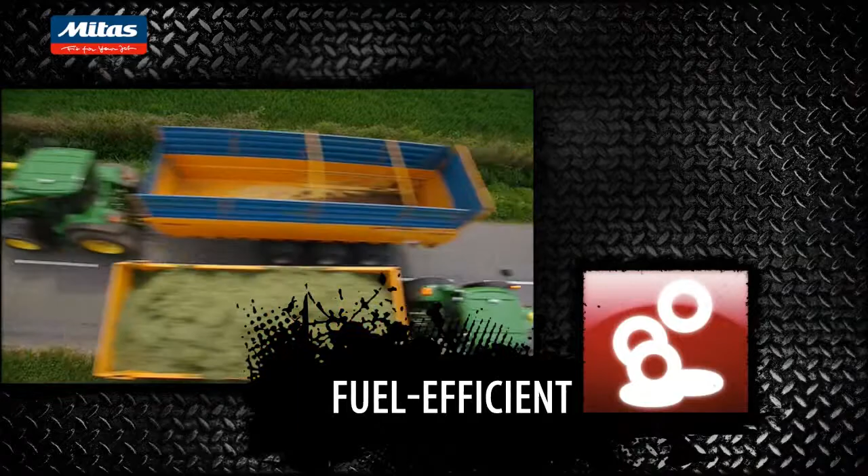Roads cover only 0.3% of the Earth's landmass. 40% is agricultural land, and the rest is new challenges and adventures. Off the roads, people need our tires. Reliable. With long life. Preserving power. Fuel efficient. Custom made. And environmentally friendly.

Welcome to MITAS. What makes our tires reliable? At our oldest factories, tires have been produced since the 1930s. These are our factories in Zlín and Prague in the Czech Republic. Originally, these factories produced tires and tubes for cars, motorcycles, and bikes. The name MITAS has been used since 1947.

Agricultural tires became the core of our business in 2004 when we acquired the agricultural tire division of Continental AG. We then bought the tire factory in Ruma in Serbia. In 2010, we announced our first North American factory, producing radial agricultural tires in Charles City, Iowa. The grand opening of the MITAS factory took place 2 years later in April 2012. Another important milestone was the opening of the new radial agricultural tire plant in Otrokovice, Czech Republic. Our biggest factory was opened in November 2013.

MITAS today. MITAS is one of the leading European producers of tires for use in agriculture, construction, and industry. Almost all speedway motorcycles in Europe are mounted with MITAS tires. 1 of 4 tractors and harvesters produced in Europe leaves the production line fitted with our tires.

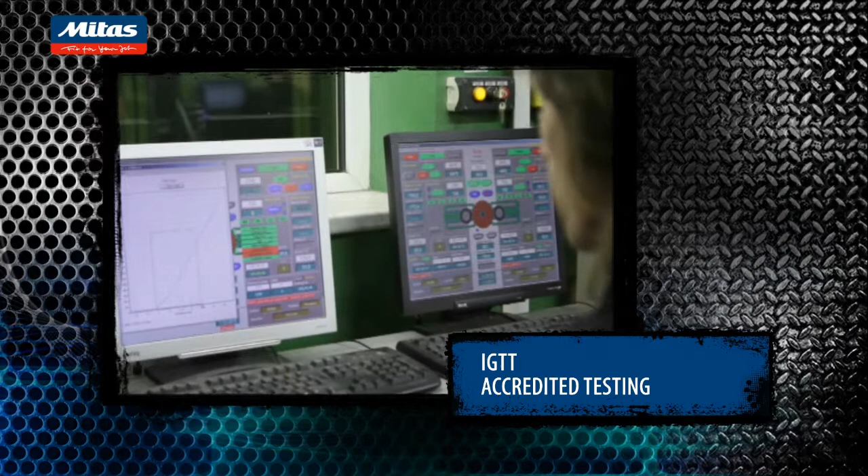We respect international standards. MITAS is a member of the International Association of Tire and Rubber Manufacturers, ETRMA, ETRTO, and TRA. We invest in research and development to make our tires long-lasting, fuel-efficient, and reliable. The process of developing a new tire, creating rubber compounds, and testing may take up to 4 years from conception to production. Tires undergo testing in operating conditions and in our accredited testing facility, the IGTT. We insist on quality, effective production, employee expertise, and environmental protection.

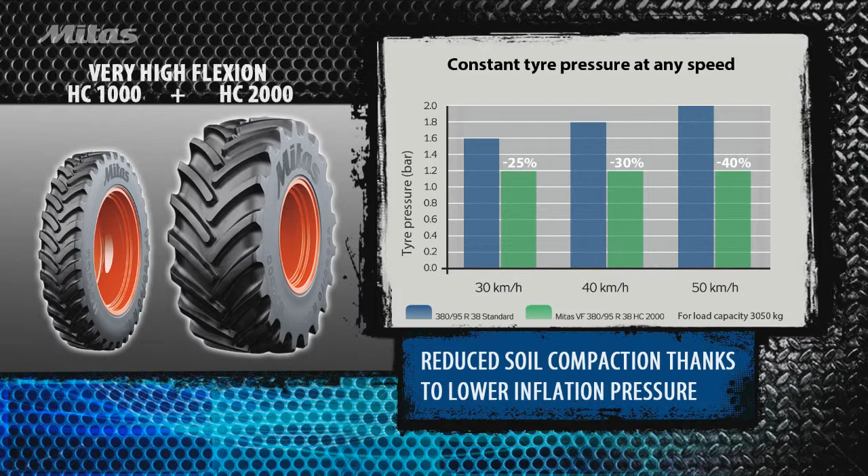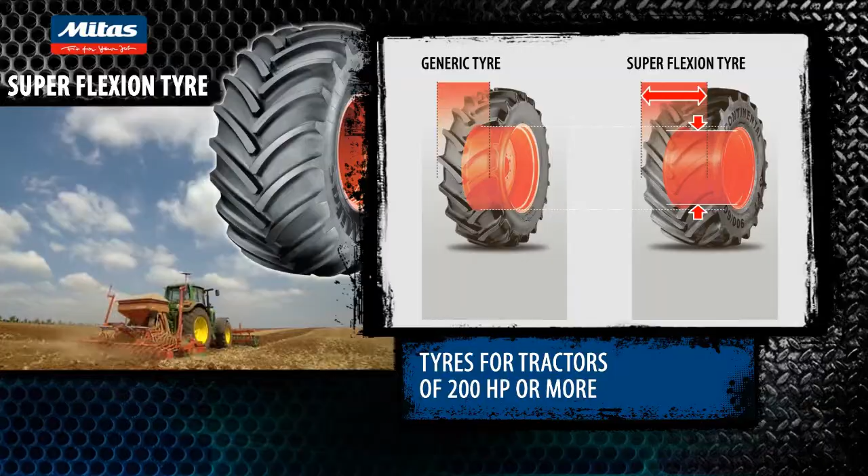Tires with new features. MITAS developed the very high flexion tire to meet the demand of increased load and speed requirements of agricultural machinery. The new VF product lines are HC1000 and HC2000. Superflexion tires are made for power tractors of 200 horsepower or more. With silent speed tires, we have managed to decrease noise levels in tractor cabins by 50%.

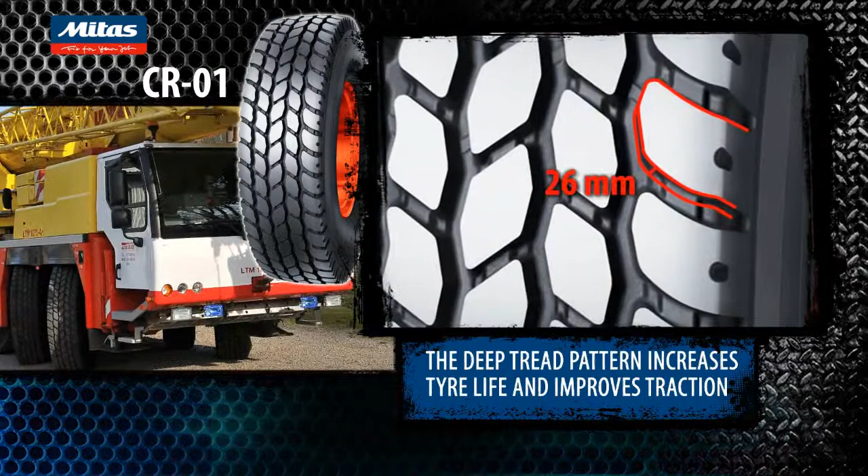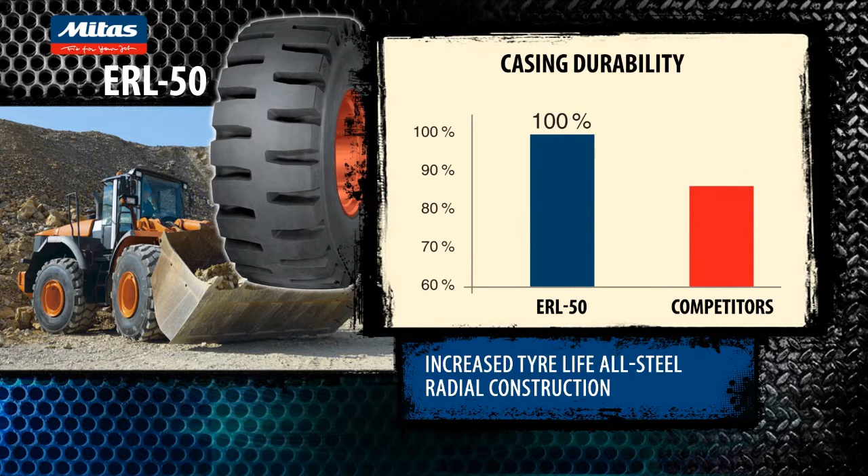When driving, the links between the tread blocks of the CR01 tires stabilize mobile cranes and even out tread wear. An innovative tread compound in all-steel radial construction increased the casing durability of the ERL50. AgriTerra is a flotation tire intended for trailers. AgriTerra has a longer tire life and improved self-cleaning properties.

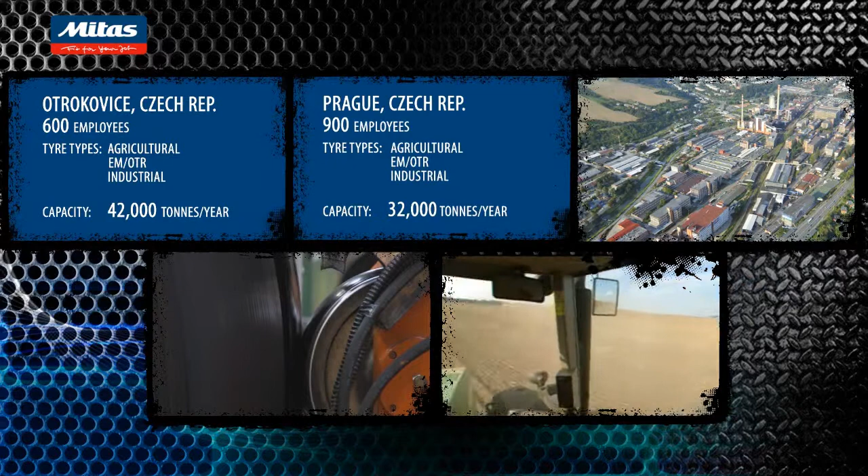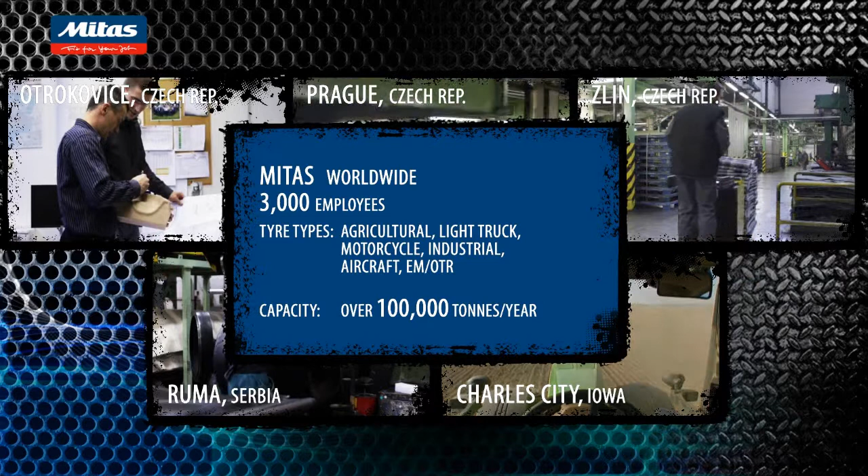MITAS production plants. MITAS produces tires at 4 European factories. In the Czech Republic, our production plants are located in Otrokovice, Prague, and Zlín. In Serbia, the MITAS plant is located in Ruma. Since 2012, MITAS is also present in Iowa in North America. MITAS has 3,000 committed employees. The total annual production capacity exceeds 100,000 tons.

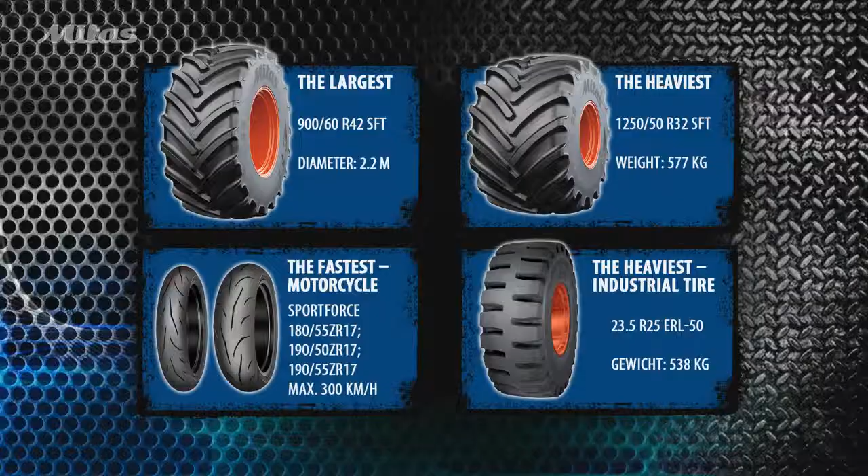Interesting facts about MITAS tires. The largest tire produced by MITAS has a diameter of 2.2 meters and features 38.5 kilometers of cord. The heaviest tire weighs 577 kilograms and contains 63.6 kilometers of cord. The fastest road tire is a motorcycle tire, Sportforce, that allows speeds of up to 300 kilometers per hour. And the heaviest industrial tire produced by MITAS weighs 538 kilograms and features a tread pattern depth of up to 90 millimeters.

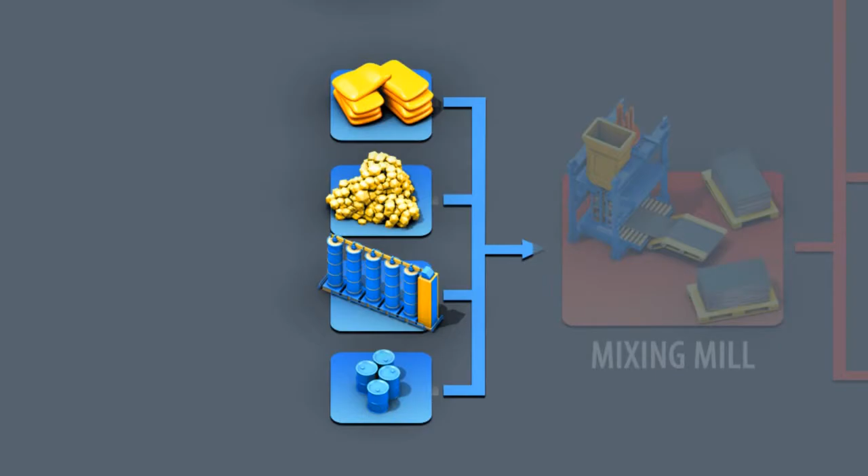This section explains how tires are produced. These are the main stages of tire production. The basic components in tires are steel wires and cord, natural and synthetic rubber, various chemicals, and carbon black. The dominant component in tires is rubber.

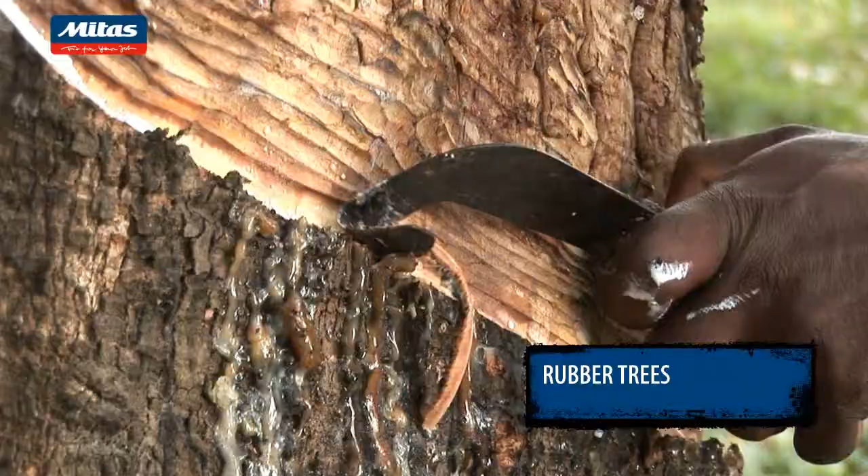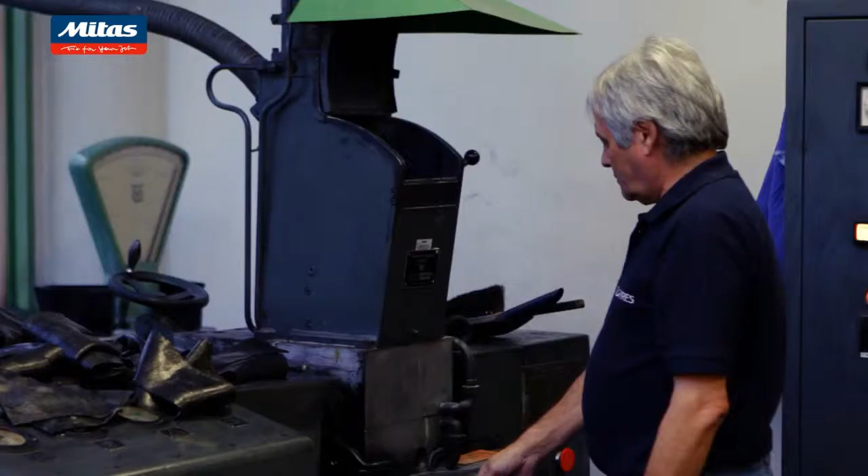8,000 kilometers from the heart of Europe, rubber trees are grown. Incisions are made to harvest the liquid latex. Natural rubber is the most important product obtained from latex. Rubber is then transported to the production plant with the rest of the raw materials and components. In a laboratory, the quality and physical properties of the rubber are tested. If the sample complies with our stringent requirements, the batch is delivered to the mixing room.

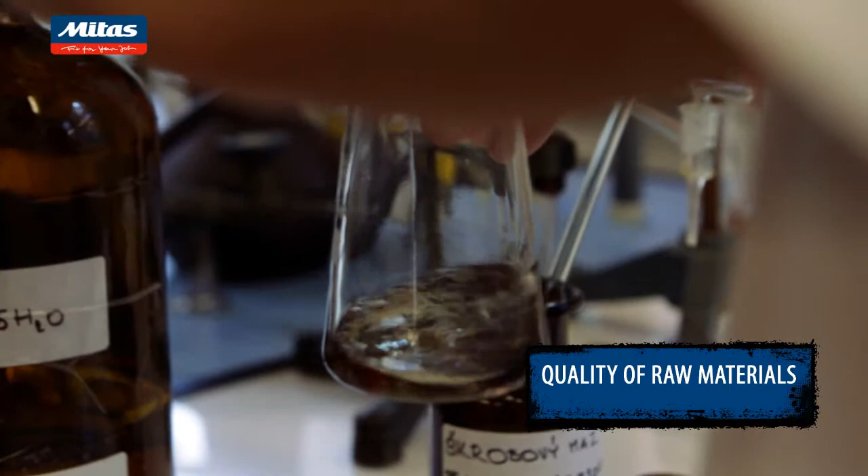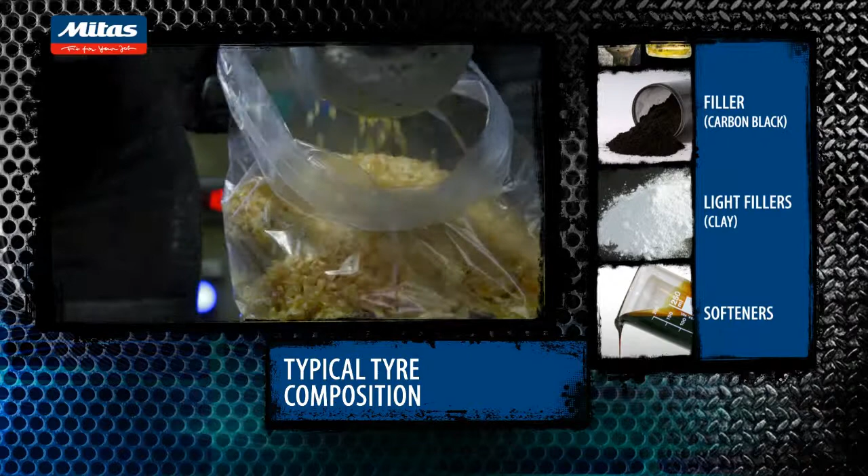Rubber compound mixing. The first stage of tire production is rubber compound mixing. At the rubber mill, the rubber is mixed with various materials. These include fillers, clay, and carbon black. At the last stage of mixing, sulfur and curing agents are added. The resulting compounds have various properties. Some are used for the inner liner, which holds air inside the tire, and others, wear resistant, are used to make the tread.

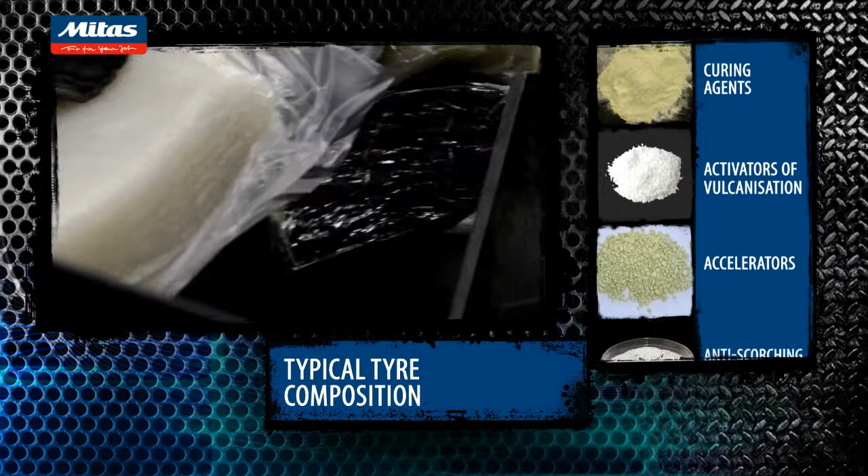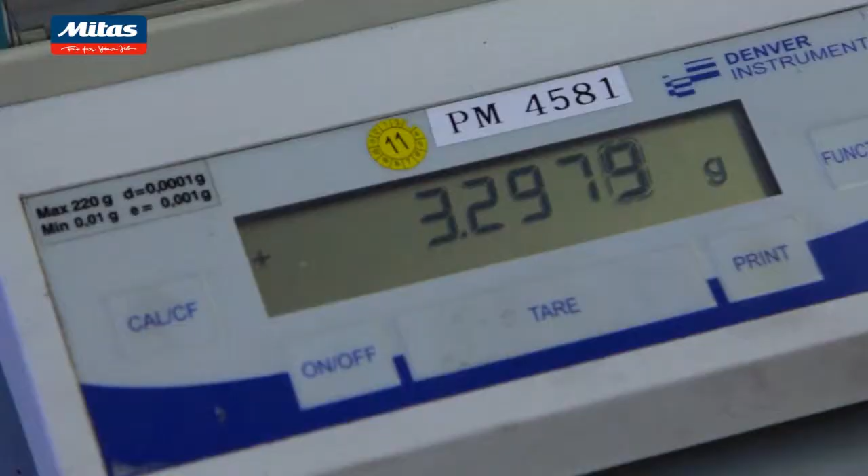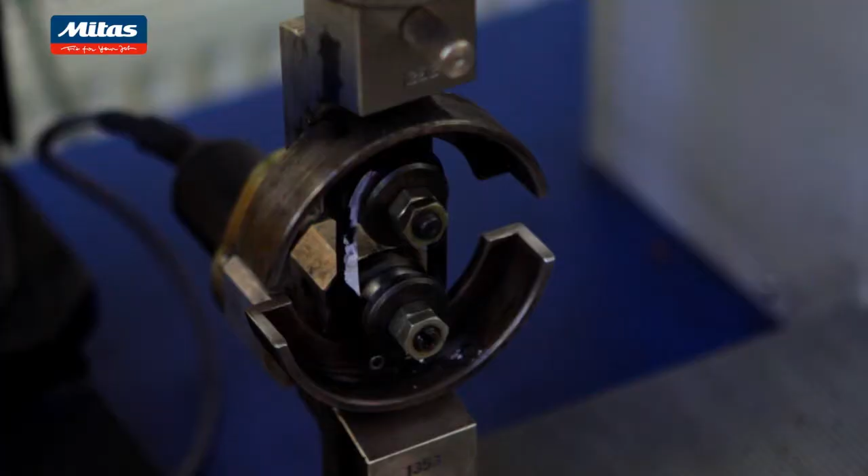In the laboratory, the density of the cured samples and other physical and mechanical properties are measured. The resulting blend is formed into rubber sheets and cooled. Each batch is weighed and identified. After additional testing, the rubber components are used in further processing.

Next, we'll show you the basic components that make a tire. The components are produced during further processing. These are bead wires and rubber-coated cord. Other components are extruded and calendered from various rubber compounds. This animation displays the basic components of an agricultural tire.

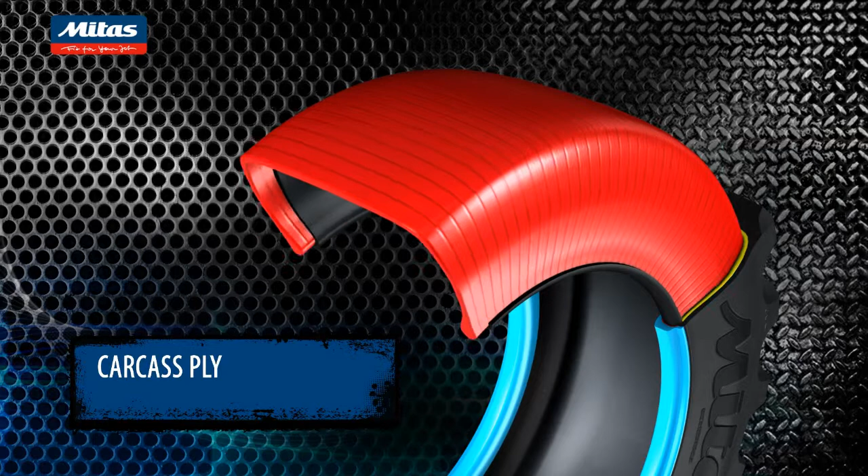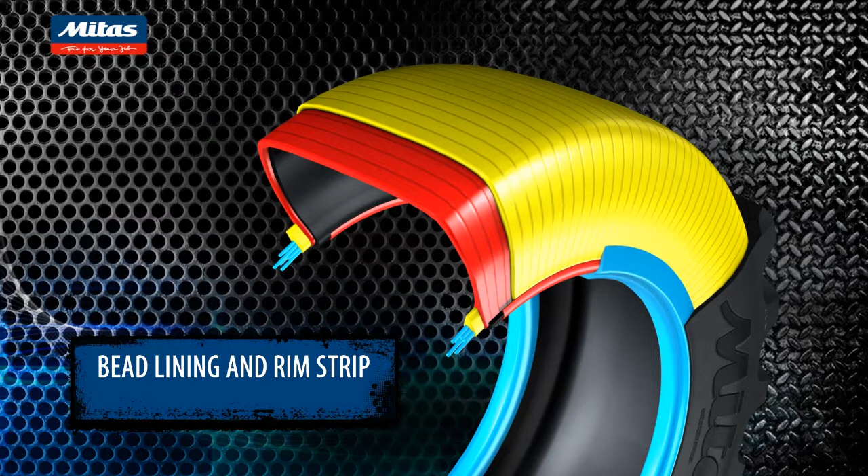The inner liner is used in tubeless tires. This is the first carcass ply. Then the bead core and bead wire. Then another carcass ply. Bead lining. And rim strip. These are belt plies. And finally, the sidewall and tread.

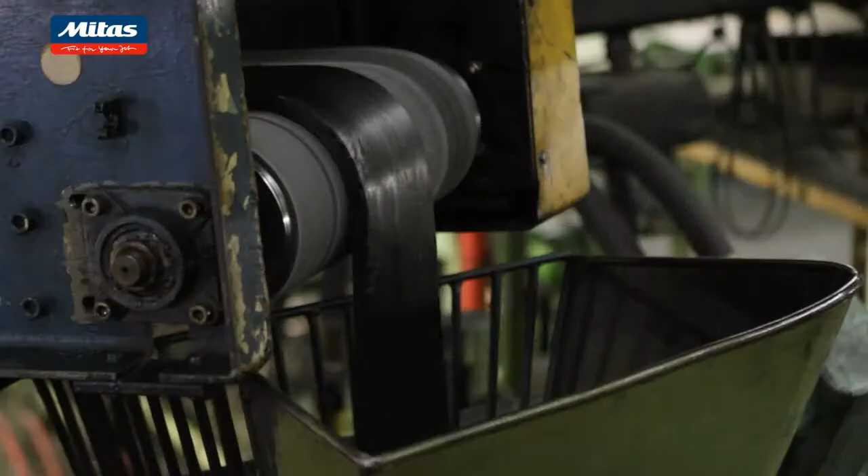Extruding and calendering of tyre components. The mixed rubber compound is used for calendering the inner liner, extruding the tread and sidewall. First, the rubber compound is heated. Then the compound is put through extruder machines, where the tread and sidewalls are formed in their required shapes.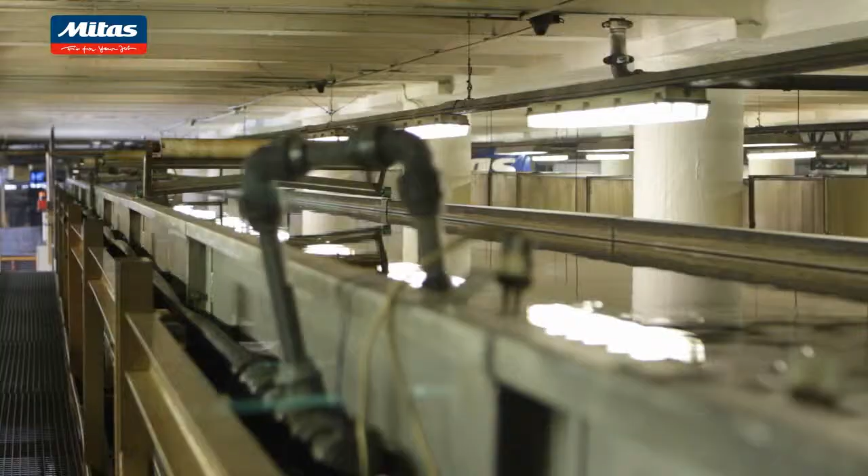The extruders produce a continuous sheet of tread rubber. The sheets are then cooled and cut into specific tire lengths. The inner liner is produced by calendering. Rubber coating.

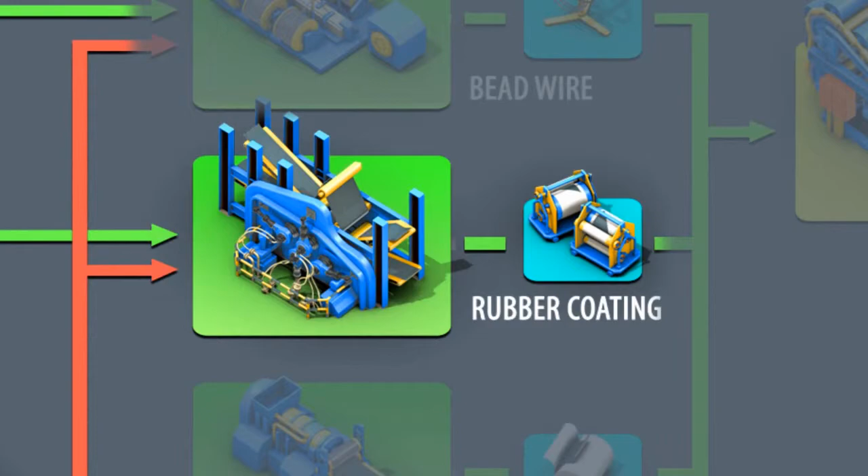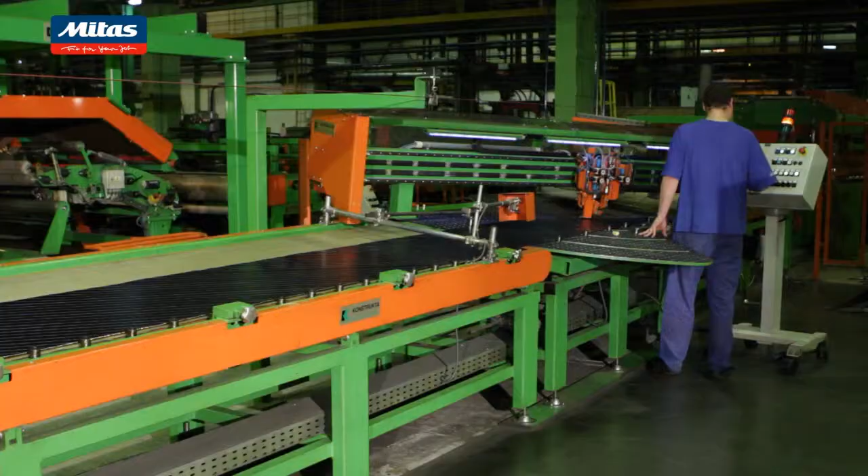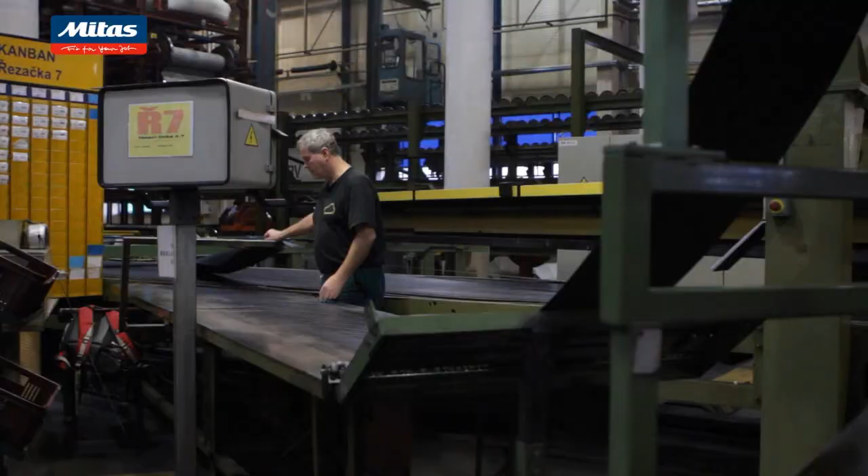The mixed rubber compound is also used for rubber coating. Sheets of cord, such as nylon, polyester, and steel, are thinly coated with rubber on both sides. Once this is finished, the sheets are cut at correct angles, which determines the tire's characteristics. These cut sheets are used for casing, belts, and other plies. Steel cords are mainly used for the belts placed under the tread and sometimes for the casing.

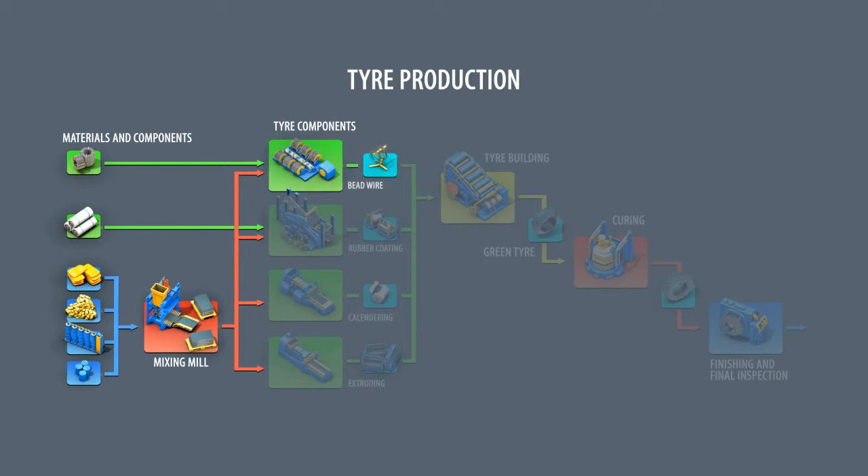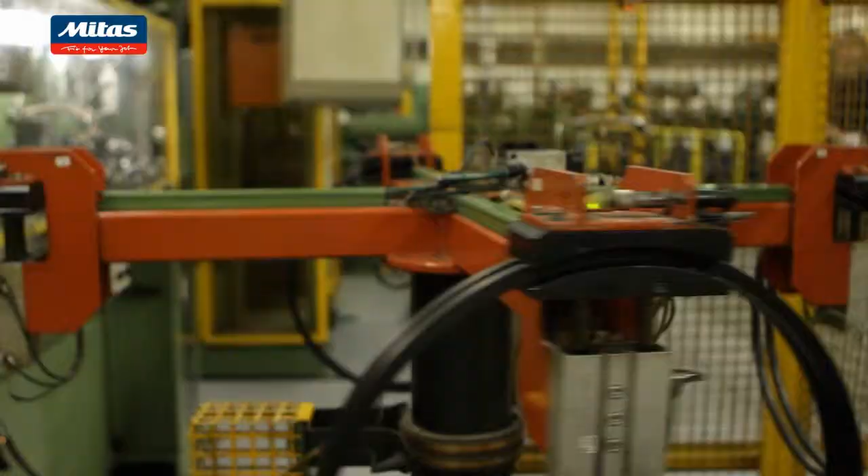Bead wire. Next, the bead wire is produced from rubber and steel. The bead core is formed by aligning and coating steel wires with rubber. Then, the wire is wound on a coil to form bead rings. The number of loops and shapes of the bead wire are specific for each tire.

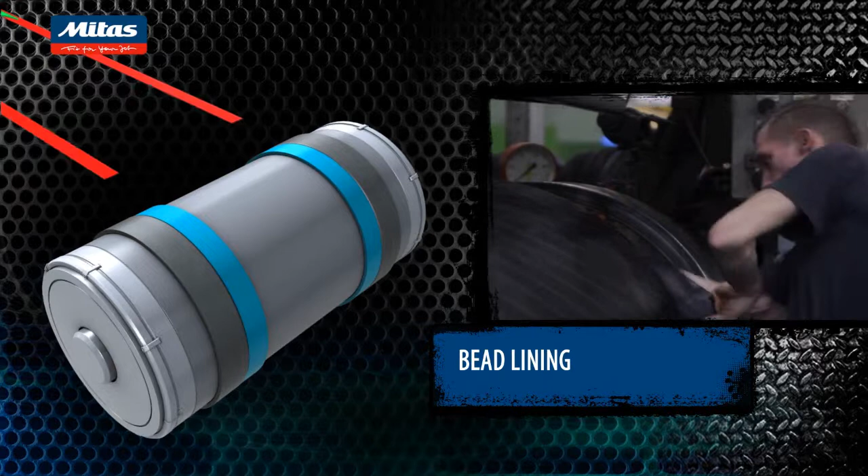Tire building. At this stage, all the tire components are assembled. The tire is made from components on a tire building drum. Tire building begins with sidewall and rim strip. This is the bead lining. Inner liner. And 2 carcass plies.

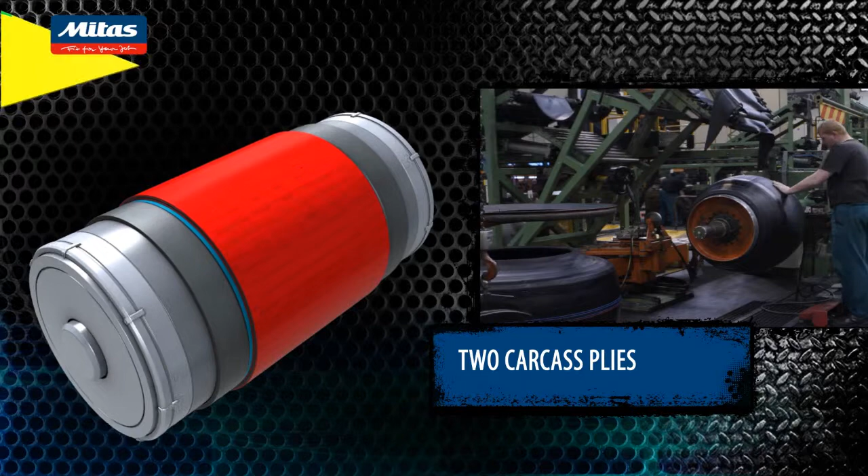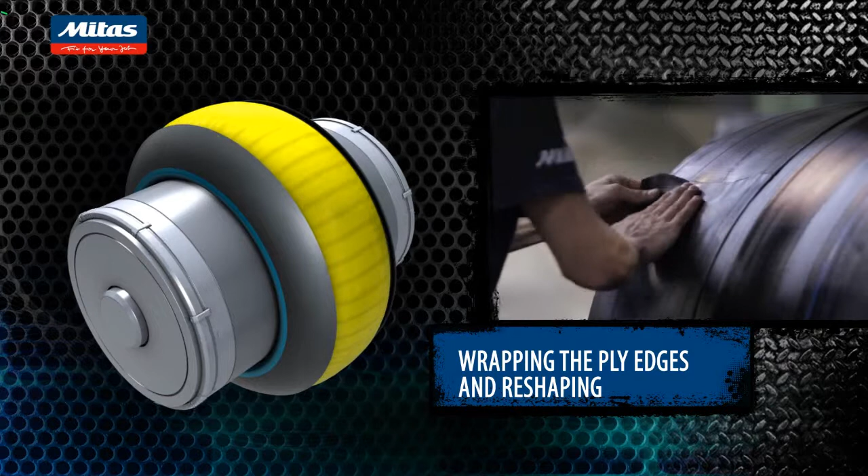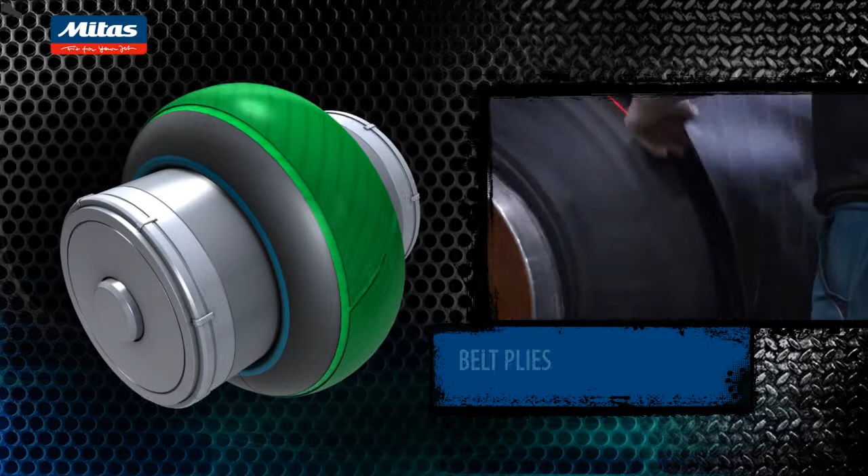Bead cores are placed on the building drum. Then the ply edges are wrapped around the bead core and the sidewalls are moved into position while the tire is reshaped. After inflation, the belts and tread rubber are applied. For large tires, the tread rubber is wound onto the belts. This process achieves a green tire that already resembles the final product.

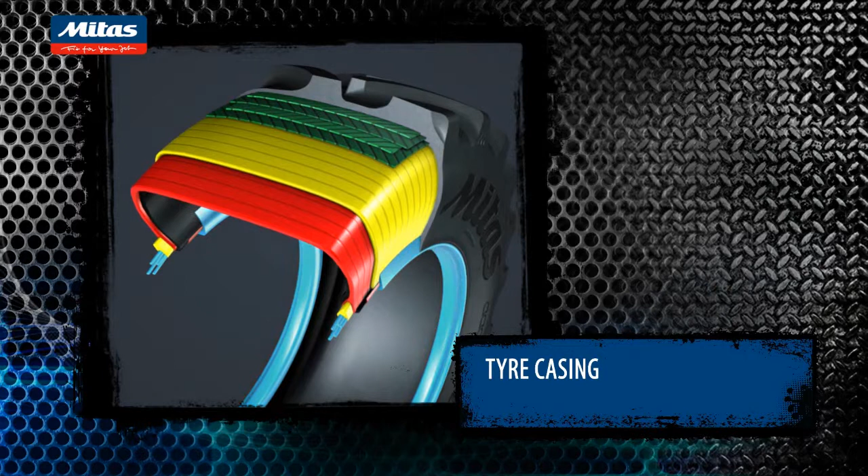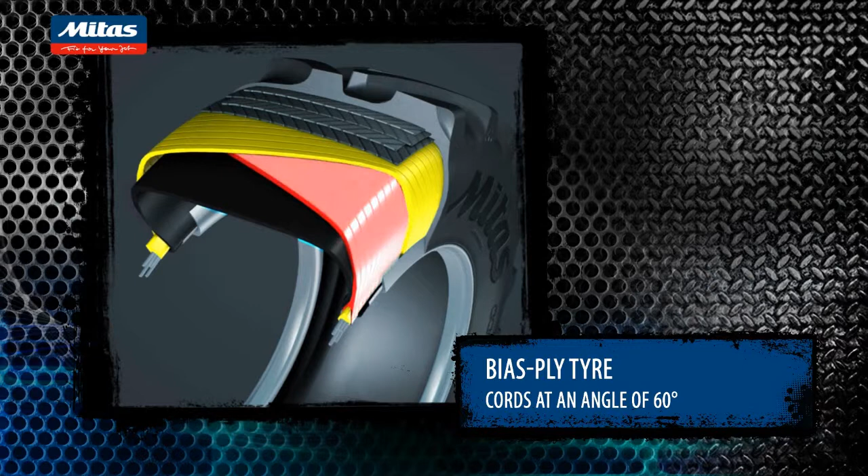The difference between radial and bias ply tires. There are two kinds of tires, older bias ply tires and newer radial ply tires. This animation highlights the tire casing. In a bias ply tire, the cord is laid at an angle of 60 degrees relative to the tire's movement. Successive plies are laid at opposing angles, forming a crisscross pattern.

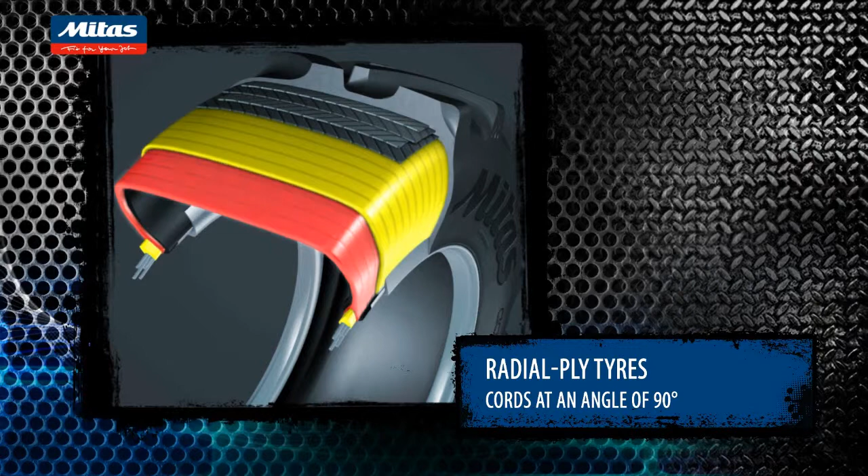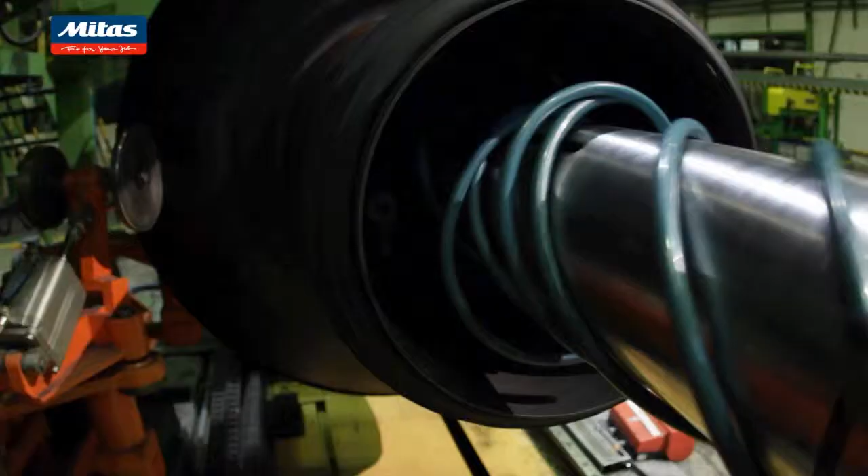Now, in the radial ply tire, the cord in the casing ply is laid at a right angle to the center of the tread. Radial ply tires are more complicated to produce, but they have new characteristics. For example, radial ply tires save fuel, last longer, and improve riding comfort. Agricultural radial tires apply less pressure on the soil and thus protect plant roots.

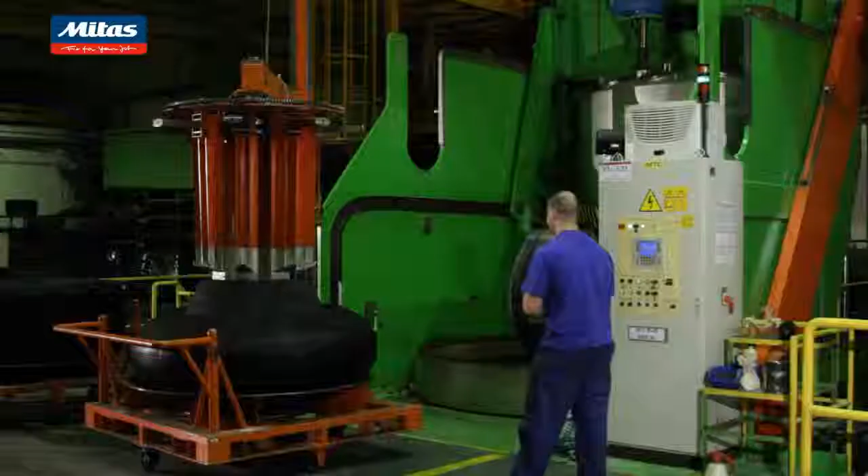Curing of the green tire. After tire building, green tires are cured in a process called vulcanization, in which the tire achieves its final shape and characteristics. This is a tire mold. Prior to curing, the green tire is covered with a solution that will help the green tire fill the mold. The green tire is placed on a curing press.

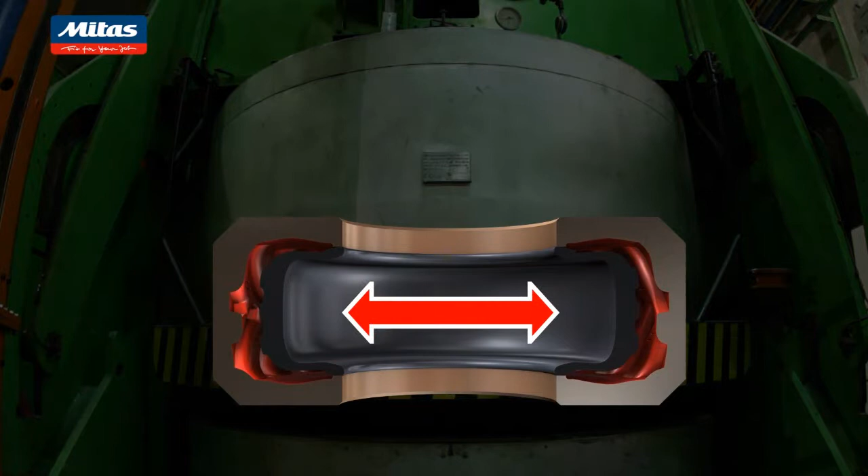The curing medium pushes the green tire into the mold. The rubber compound is heated and becomes plastic. It fills the mold. The vent system lets excess air escape the mold so that the rubber fills the mold completely. The applied heat also initiates a process called vulcanization.

This is the basic element of natural rubber molecules, which is a polymer. During vulcanization, these polymers are linked by sulfur. This changes the molecular structure into a three-dimensional pattern of interlinked polymers. The vulcanization of a passenger car tire takes only a few minutes. For an agricultural tire, this process can take up to 2 hours. This is the final product, a cured tire.

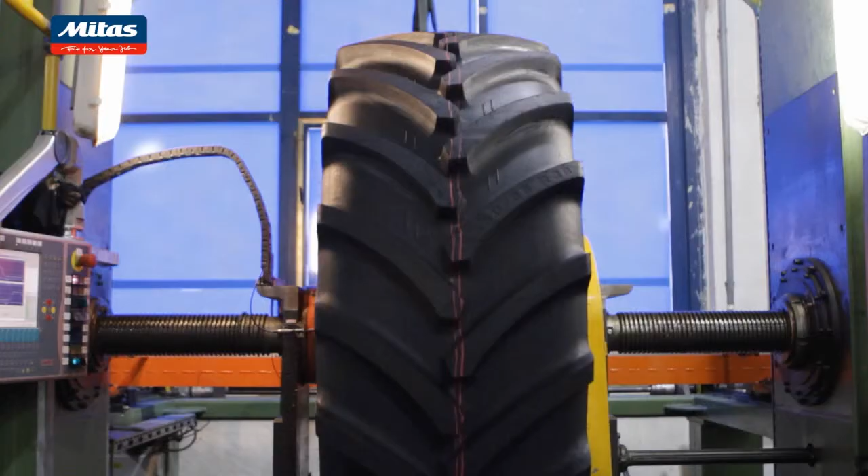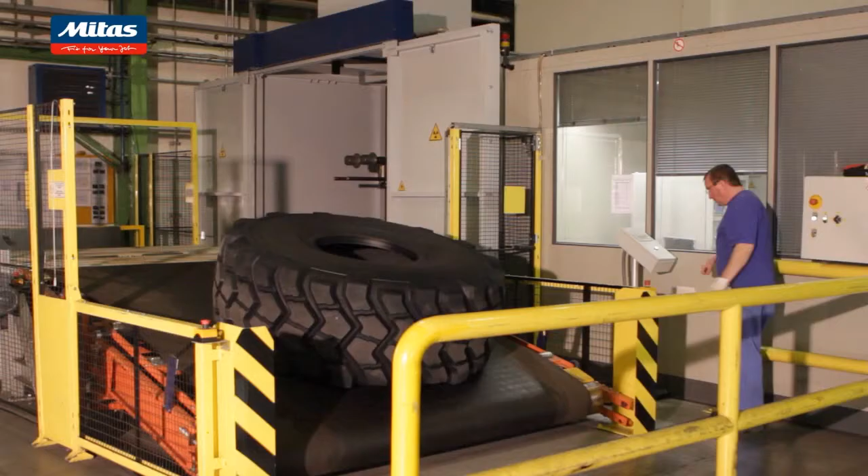Finishing and final inspection. Before the tire is dispatched from the plant, it is trimmed to order and inspected. Each tire is visually inspected for surface defects. Testing machines measure the compliance of radial and lateral runouts with the norms. All tires undergo a uniformity test. Tires containing steel cords are inspected by X-ray for internal defects. The final inspection is the last stage of the tire production. The tire is then stored and ready to be dispatched to customers.

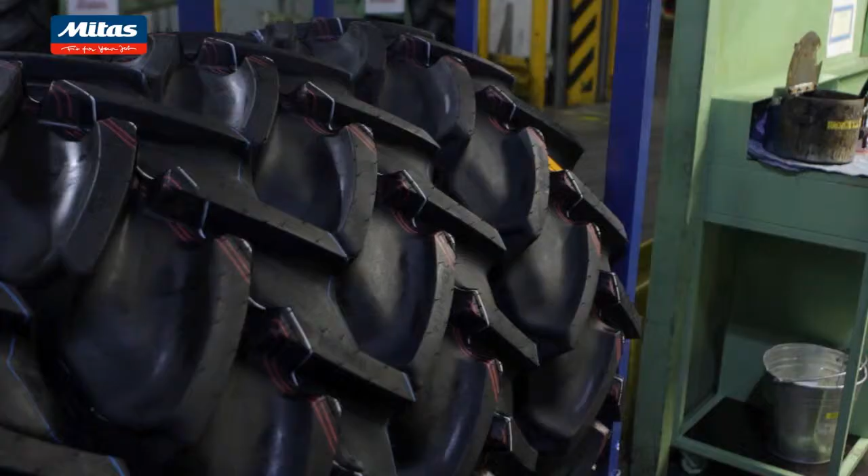MITAS produces tires under 3 brands. These brands are MITAS, Continental, and Cultor. In total, we produce 1,500 various tire sizes and tire variations. From power tractor tires to tires for construction vehicles, from tires for use in speedway competitions to durable tires with long life.